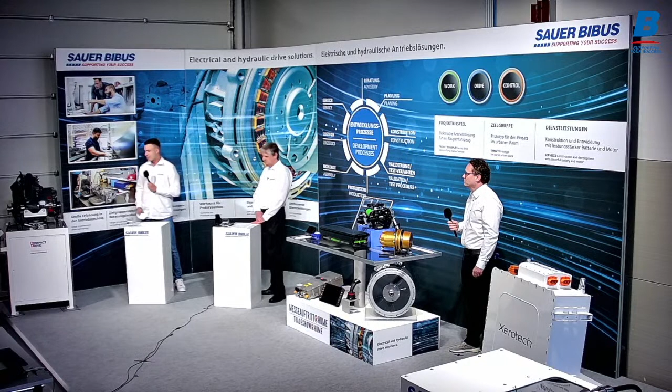Sorry for the English-speaking people. Maybe just a very small summarization, but he explained so much that it is not possible for me to explain everything again. So it's a wide-angle technology. We have roughly 300 cubic centimeter or 233, and it's a very fast shifting gearbox integrated. So that's more or less the situation.

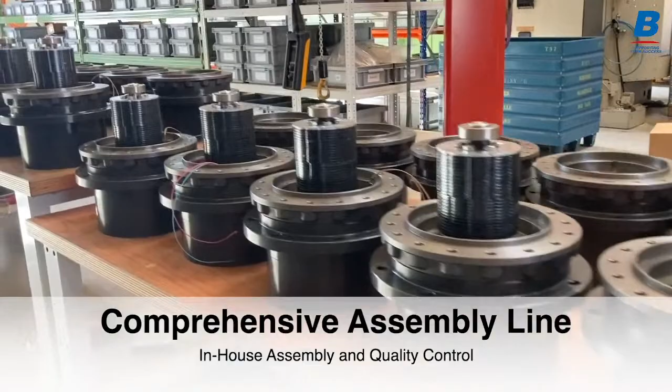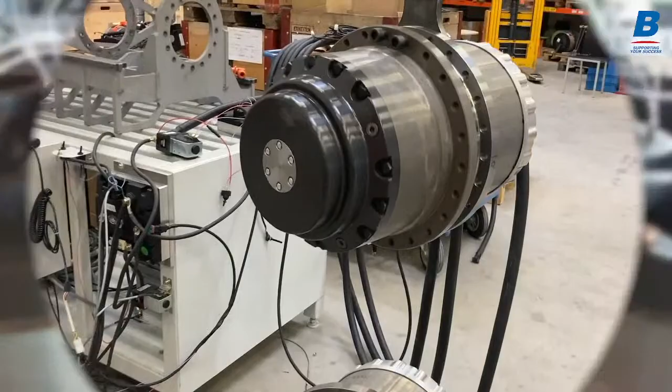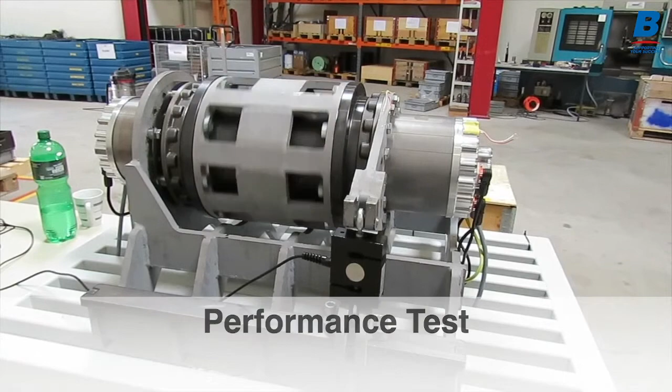We want to contribute to eco-friendly and sustainable industry solutions. In electric final drives, we offer an environmentally clean and zero CO2 emission solution on an economically solid basis. We are a Swiss company that aligns with the highest quality standards of engineering and production. INW designs products to generate value for our customers, and we are committed to the utmost professional and ethical standards of business.

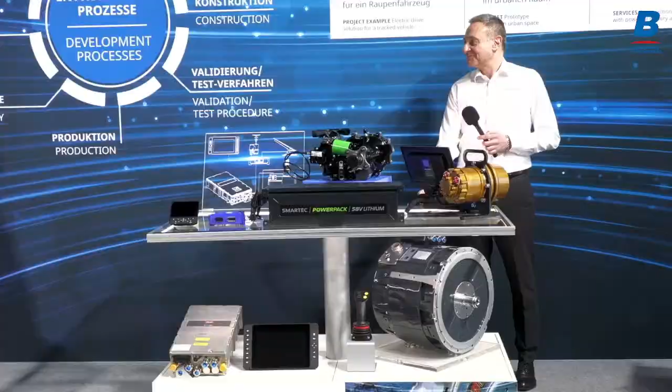Thank you, Ralph. So, as Ralph mentioned, Hydrogear is a joint venture between Danfoss and AF Holding. Hydrogear is a US-based company, and during its 30-plus years of history, Hydrogear managed to become a world leader in the design and manufacturing of very performant drive systems. Our products are built in the US in one of our 4 manufacturing plants where we employ more than 1,600 people. We also have representation offices in China and in Europe for almost 20 years.

Most of our products are sold directly to OEMs in the lawn and garden industry, but not exclusively. Many of them actually are suited for what most of us would call light-duty mobile industrial applications. And Sauer Bibus is one of our very important partners that addresses this market. More than 10 years ago, Hydrogear recognized this electrification trend and started to invest heavily in developing electric and electronic components. All these components are under the brand Smartec.

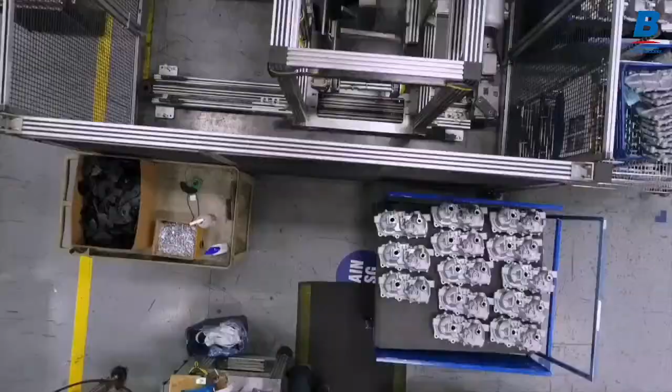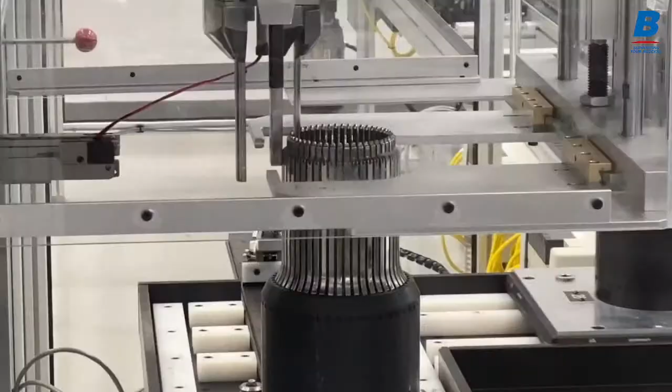Hello, I am Luciani Wan and I'm responsible for Hydrogear operations in Europe. Those of you who are familiar with Hydrogear also know that we have been a leader in the hydraulic market for over 30 years. You may be aware of our integrated transaxles and our commercial axles and pumps for professional users. But did you know that we also offer industry-leading electric products? Under our Smartec brand, you can find everything from electric actuators that add drive-by-wire and remote control capability to current hydraulic systems, to full electric systems, traction drives, work electric motors and batteries.

Visit our website for more details.

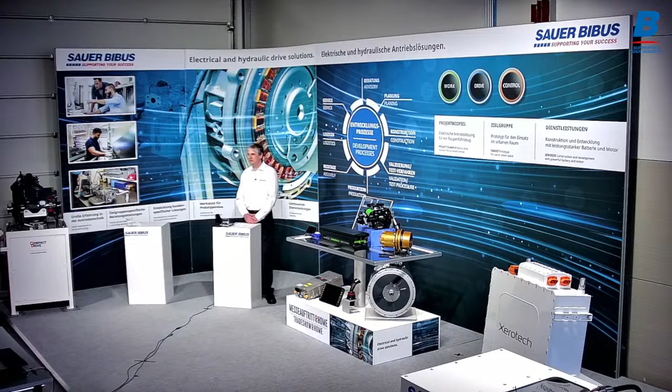Yeah, it's really a pity that the Agritechnica was not possible, because that would be our possibility to present everything and to show that we are well known in electric transmission in the meantime, and we did a lot, but you will see in the end. Please be with us. The best will follow in the end.

Now that was the low voltage area first of all, but of course high voltage is also necessary if we go to a bigger excavator or whatever, to bigger construction or agriculture machineries.

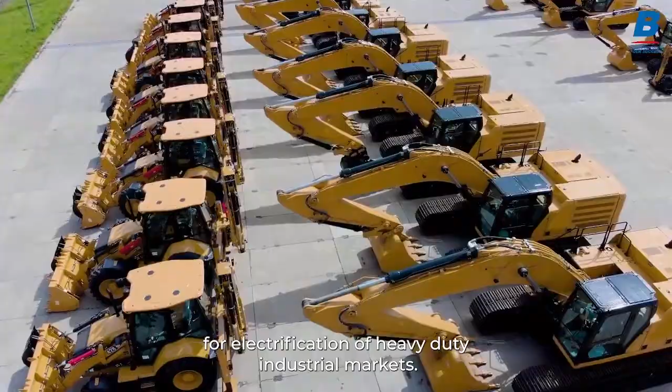Automotive is electrifying, but we at Xerotech ask ourselves, what about everything else? We are at the inflection point where recent advancements of battery technology have finally allowed for electrification of heavy-duty industrial markets. 100 years ago, the diesel engine disrupted the horse carriage market. Battery systems are set to repeat history, and the diesel engine is the new horse as we enter the emission-free era.

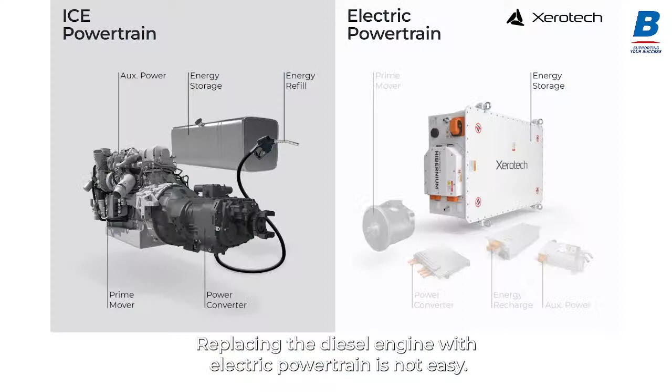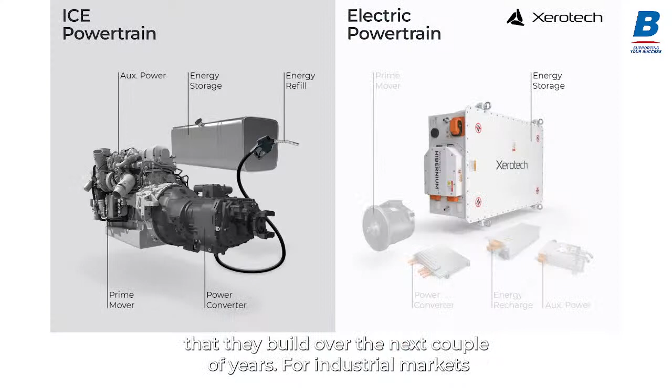Replacing the diesel engine with an electric powertrain is not easy. Automotive OEMs have billion-dollar budgets to develop their electric platforms, because they spread the cost across thousands or millions of vehicles. For industrial markets, it's not a viable solution. The product lines are low volume, high diversity, so the electric powertrain needs to be customized for each application or even use case. We at Xerotech focused on what we believe is the most challenging part, the energy storage, the battery system.

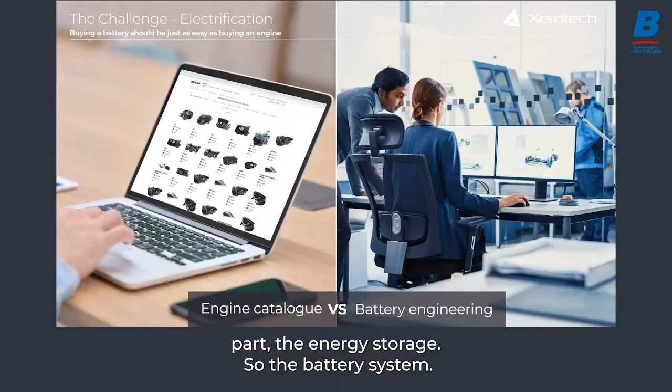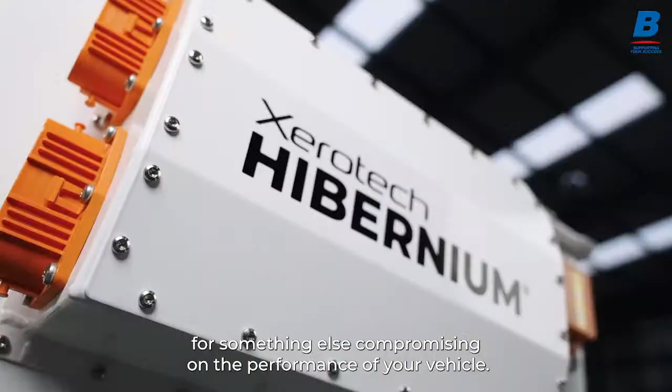Up until recently, when designing new machinery, you could select your diesel engine from a catalog of options, from many suppliers, in any shape and size suitable for your application. Buying an electric powertrain becomes a science project. The availability of components is not great. You would either have to design a battery system for each application or buy a battery designed for something else, compromising on performance. That's where Xerotech enters with its Hibernium battery pack platform. Where standardization does not exist, configurability is the only viable solution to your diversity.

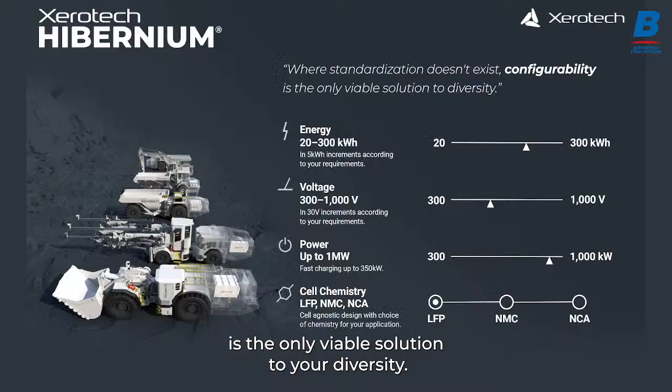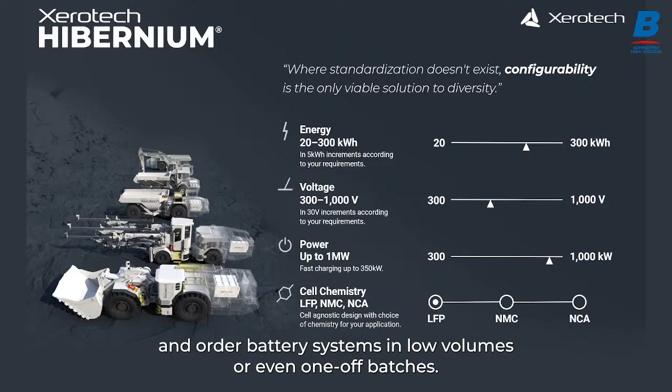With the Hibernium battery pack platform, you're able to select your preferred configuration of energy, operating voltage, and even cell chemistry without the need to pay any design or NRE costs, and order battery systems in low volumes or even one-off batches. This enables you to electrify the complete low-volume, high-diversity fleets of your products with one platform battery systems.

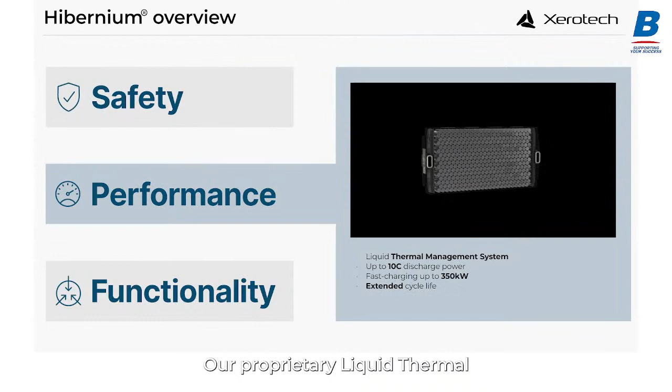Apart from the configurability of the solution, our Hibernium battery pack platform offers you market-leading safety, performance, and functionality. With our passive propagation resistant and active fire suppression system, Hibernium batteries are amongst the safest batteries available to buy today. Our proprietary liquid thermal management system offers you improved performance with increased charging and discharging power, but also extended cycle life compared to other solutions available on the market today.

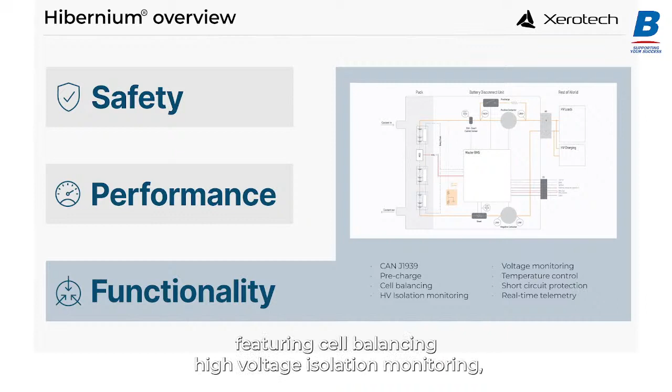And all our batteries are equipped with our proprietary BMS system, featuring cell balancing, high voltage isolation monitoring, voltage monitoring, temperature control, real-time telemetry and diagnostics, and over-the-air updates. All available over the CAN J1939 communication protocol that you're familiar with.

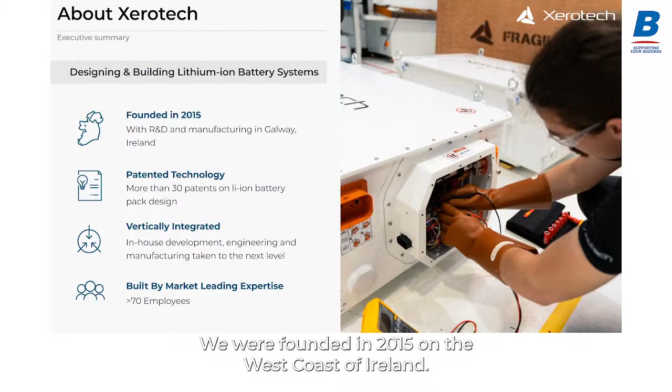And more about Xerotech, we were founded in 2015 on the west coast of Ireland. We have more than 30 patents on battery pack technology and manufacturing processes. We are heavily vertically integrated with in-house development, engineering and manufacturing taken to the next level. And we currently have over 70 employees and are growing rapidly with our customers, having exceptional market reception of our Hibernium battery pack platform.

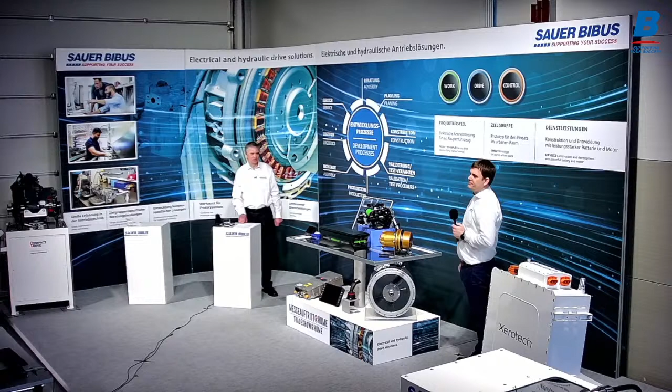Just to go ahead, it was the system idea which Stefan presented here again, and we go ahead into the high voltage area. We come now to our long-term biggest partner, Danfoss. That is the reason why we are called Sauer Bibus, because we were in former times a daughter of Sauer Sundstrand. Then it was Sauer Danfoss, and nowadays it's Danfoss Power Solutions. And within Danfoss Power Solutions is integrated Editron, and Editron is a field of electric motors.

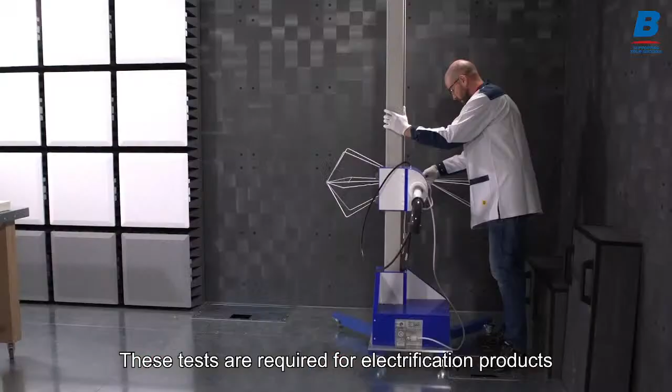Hey, welcome to the Danfoss Editron. Let's go in. We are currently here in our EMC laboratory. EMC stands for electromagnetic compatibility. These tests are required for the electrification products to fulfill the quality and legislation requirements on the electrification industry.

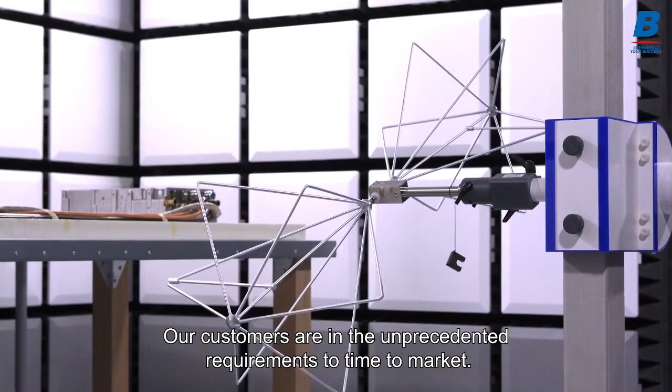Electrification market moves super fast. To keep up with the market, we need to make significant commitments like the full capabilities with the EMC and environmental testing capabilities. Our customers are in the unprecedented requirements to time to market. We want to be their best partner and really match to these requirements, which we can now do with our own laboratories. And with the fast time to market, we same time make sure that the quality is what is expected.

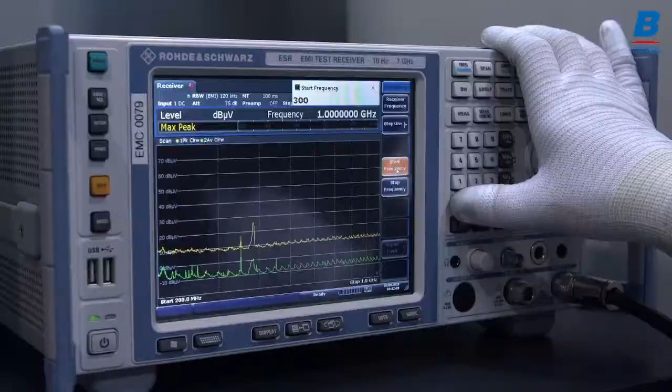The products we can serve is electric motors, drives, DC-DC converters, and onboard chargers. Let's take a look at some of our reference cases next. The future is electric, and we have put together team and the capabilities to lead the way.